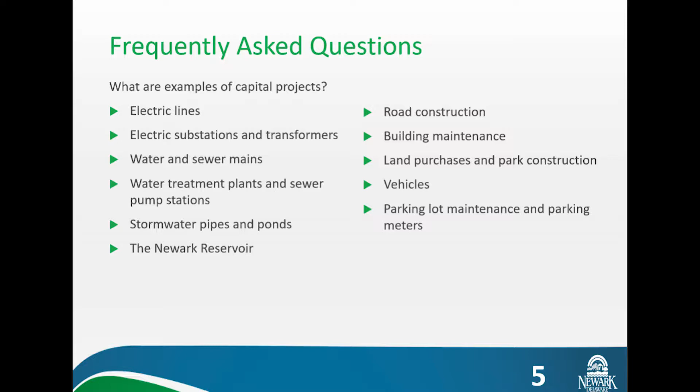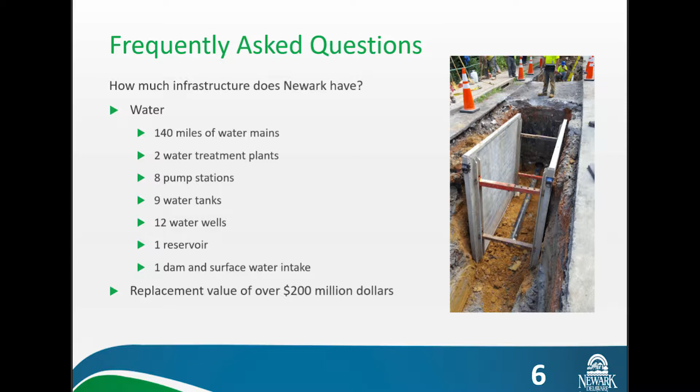We have the most water infrastructure by a large margin, and most of these items are quite expensive. For example, it costs us around $1.2 million to replace 1 mile of small diameter water main like what's in front of your house. In total, we estimate the replacement value of our water infrastructure to around $200 million if we had to replace all of it today. That's almost $6,000 worth of water infrastructure for every resident, and that's just for water.

We also have a lot of sewer infrastructure. The total replacement value for sewer is less than water because it can be more easily rehabilitated, often without digging up the street, but the value is still more than $67 million.

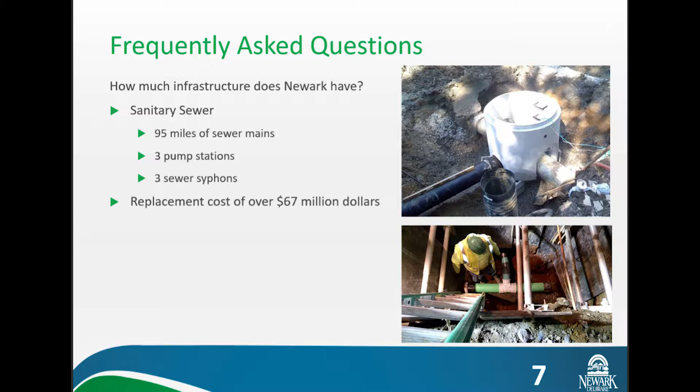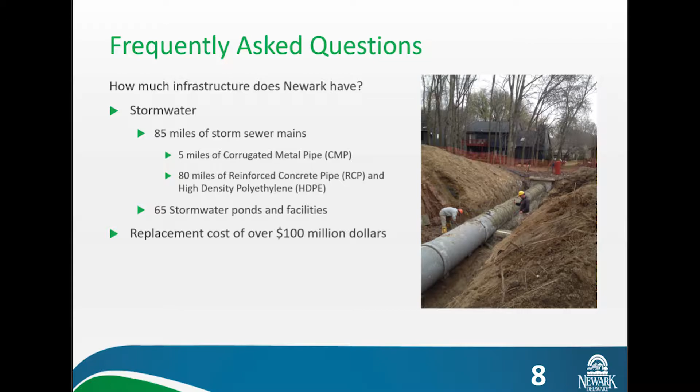Stormwater is even more than sewer at around $100 million. Stormwater is somewhat unique in that we have different pipe materials with dramatically different life expectancies, to the point that we track them differently. Right now we're really only concerned about one type of pipe: corrugated metal pipe, which we refer to as CMP. CMP lasts around 35 to 40 years on average, and we have around 5 miles of it. This is the pipe we're really concerned about now because most of it is already at or beyond its expected life. The rest of our pipe is generally reinforced concrete pipe or high-density polyethylene, both of which have an average life of about 100 years.

In addition to our pipes, we have 65 city-maintained stormwater ponds and facilities, mostly in residential neighborhoods.

Our electric infrastructure is made up of substations, lines, transformers, and our McKee's solar facility off Cleveland Avenue. We estimate the replacement value of our electric utilities infrastructure to be $50 million or more, and that's going to be, I would say, our least confident estimate. It's likely higher, but we went with a low estimate at this time while we're working on it.

In addition to our traditional utilities, we also have our parking infrastructure, consisting of our downtown parking lots and meters. Our parking fund is treated the same as a traditional enterprise utility in Newark, with revenues being kept separate from the general fund, aside from a margin transfer, which is essentially the city's profit margin. Lastly, we have our general fund infrastructure, which includes city-maintained streets, City Hall, the police station, our parks, and other city-maintained facilities.

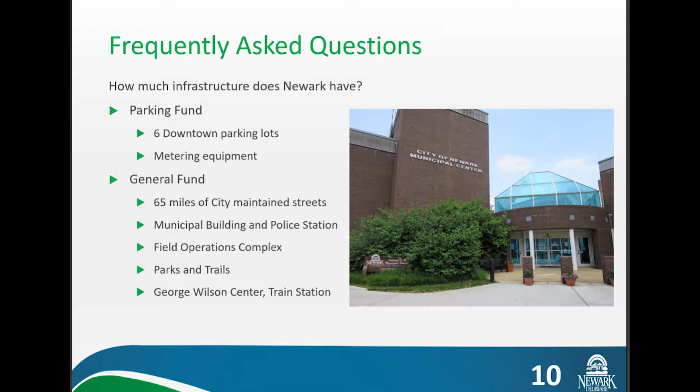This is the infrastructure that's supported by taxes, fees, and margin transfers from the city's various utilities. In total, we estimate the current replacement value of our infrastructure and capital assets at around $500 million. That's a huge number for a city of just over 33,000 people. That means we have over $15,000 worth of infrastructure for every resident in the city.

The vast majority of it's underground or at least out of sight, out of mind. So it's easy to forget about until you hit a pothole with your car, or your toilet won't flush, or the lights go out. Now, while it's helpful to know how much of everything we have, it's even better to know what condition it's in so we can plan.

So what is the condition of our current infrastructure? I'm going to go through each type in the same order, and you'll see we have different amounts of information for each one. Starting with water, I'm going to first focus on mains because they make up the majority of the value of water's assets.

Getting good condition assessment on water mains is difficult because they're under pressure and they need to remain in service during the assessment. We've begun piloting technologies that will indirectly measure the remaining life, but widespread implementation is still in development. In the meantime, we use a combination of our water main break history, water quality complaints, pipe age, pipe material, and industry guidelines to estimate the remaining service life and prioritize replacement.

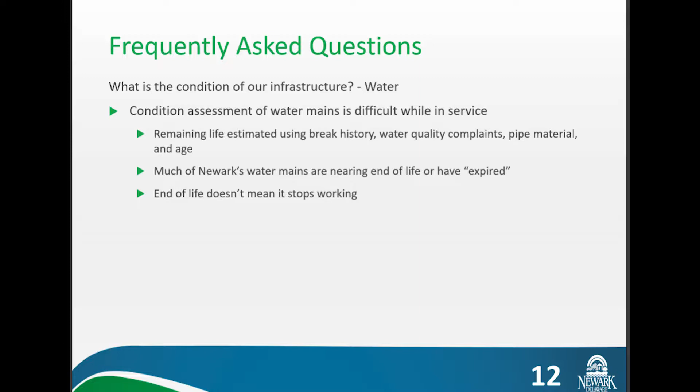As I'll show in the next few slides, a lot of our water mains are going to hit or exceed their expected lifespan and expire in the near future. It's important to point out that expiring doesn't mean the pipe will stop working though, but I'll explain more shortly.

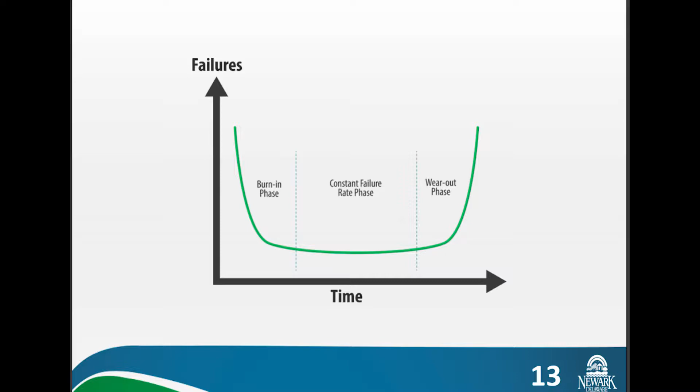Generally, the older the main, the longer the life, until very recently, that is - backwards, the older the longer, until very recently when we started using some advanced laying practices. Our oldest mains, like what's on Main Street, were very thick with an expected life of 100 to 120 years. Mains installed in the middle of the 20th century have a much shorter life, sometimes as low as 55 years. And then mains installed since 2016 are back up to 100 years or more. So it does vary based off age.

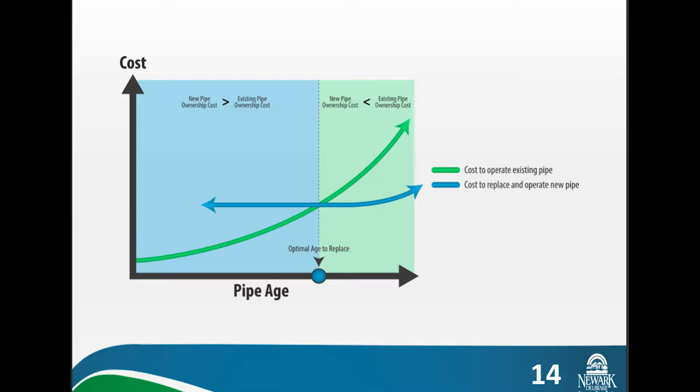The break-even age will depend on, like I mentioned earlier, the pipe material, the manufacturing methodology, but also heavily on soil conditions, because the soil is what causes a lot of the corrosion. We're working right now to develop an accurate estimate for all of our 140 miles of pipe, but that's going to take some time. For the sake of this presentation, we're going to show you information using recommendations from the American Water Works Association, or AWWA, which is to assume 70 years on average.

We feel that based on which areas of the city are experiencing advanced failure rates, this is generally going to be accurate for Newark, or at least accurate enough to give you an idea of the city's average condition.

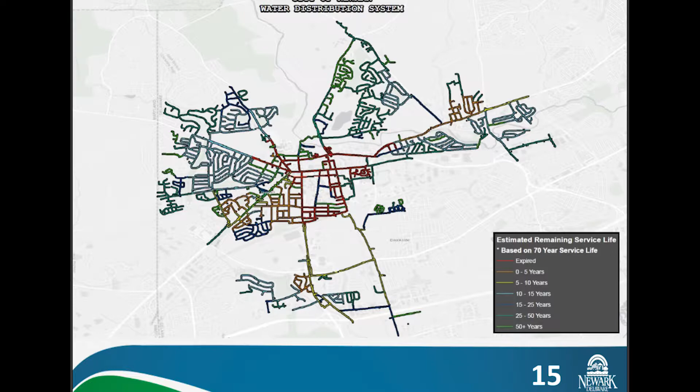Now there are some mains on here listed as expired, like Main Street, that likely do have some service life left despite being over 110 years old. But there are some mains shown with remaining life that are likely already into the expired category. Because of that, try not to focus on individual locations and instead more on the general magnitude of each category.

Looking at all of the pipes in our system, 15 years from now, that number is going to be 74 miles, absent a continued or increased effort to replace mains. That's 57% of the system. It'll be 59 miles even if we hit our current target of replacing 1 mile every year. That's 42% of the system.

And this doesn't count our raw water pipes that carry untreated water and are going to be in similar condition. Based on a recent study by Utah State University, the nationwide average is 16% expired. So we're currently doing better than average, so that's good. But you can see it's not going to be that way for long.

Nationally, the percentage of expired pipes has doubled since 2012 from 8% to 16%. So what we're seeing is being seen nationwide. And the break rate for cast iron pipe, which makes up much of Newark's pipe infrastructure, has increased 46% over that same term nationwide. So this is a problem that's accelerating.

So what does it mean for Newark? Well, we should plan for more water main breaks and interruptions in service. Here we've charted the number of water main breaks every year going back to 1977, which is the first year that we have records. There's a definite trend, which is only going to accelerate as a higher percentage of our mains move into that expired category.

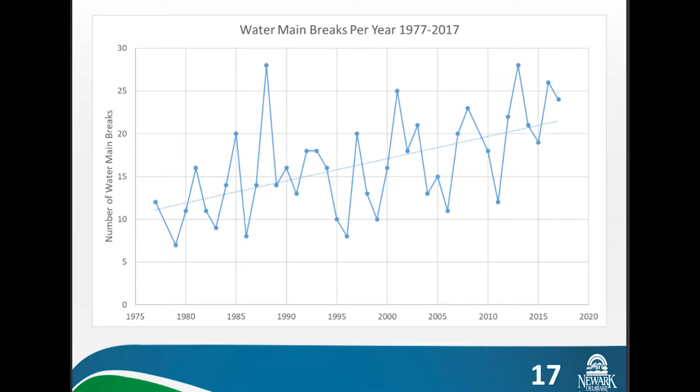Each one of these breaks is generally accompanied by a service outage and occasionally by a boil water order, which can last 24 to 48 hours. These outages have a negative effect on quality of life and, if near a business, on their revenue. Like I said earlier, the pipes don't stop working, they just stop working well.

Moving on from water mains, starting in 2011, the city began increasing our water rates from the artificially low rate that was in place at the time. This has allowed us to really do a lot of capital improvements over the last few years, and we've ramped up our capital maintenance efforts.

While water mains make up the majority of our infrastructure, our other water facilities have a much shorter life, so they punch above their weight from a budget perspective. We've been very busy over the last 7 years, and we've completed over $17 million in water capital fund projects.

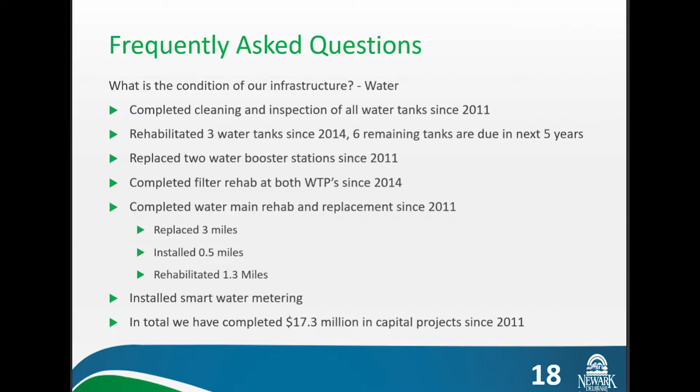We have 2 water treatment plant projects that are currently underway or are expected to be completed in the next 12 months. The first one just went online last week or 2 weeks ago, at our South Well Field treatment plant, making some modifications to our pH system there. The second is a project to convert from chlorine gas to a liquid system at our surface water plant and make a bunch of other upgrades to the building envelope.

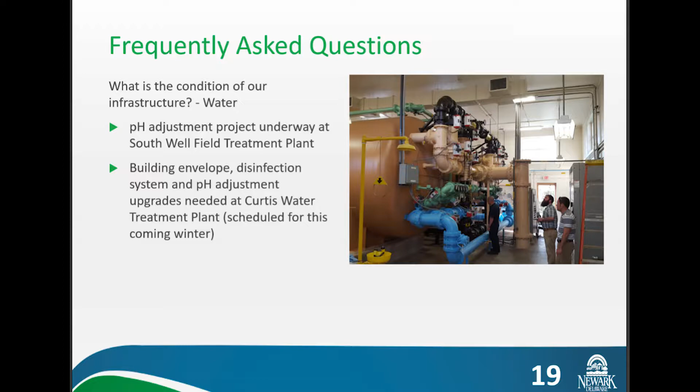On the sewer side, we've been working to inspect and develop a prioritization for our rehab work. So far, we've inspected around 15% of the system and identified around $4 million of high priority repairs. We began making many of the repairs during 2017. We'll have another project underway this summer. It's actually underway right now.

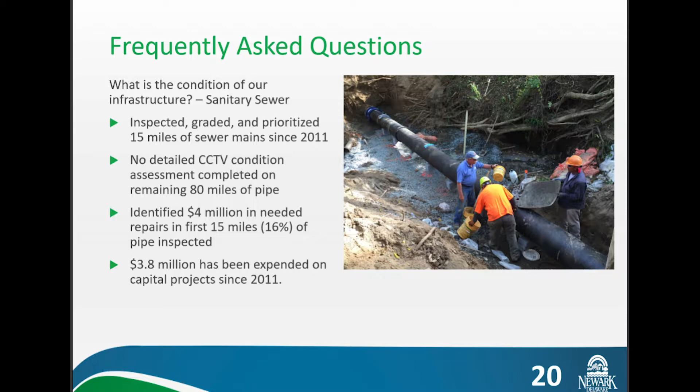Since 2011, we've spent nearly $4 million on sewer capital projects and have rebuilt all of our sewer pump stations to modern standards. On the stormwater side, we've been focused on corrugated metal pipe, like I mentioned earlier, since it has such a short service life, and it's been failing all over the city.

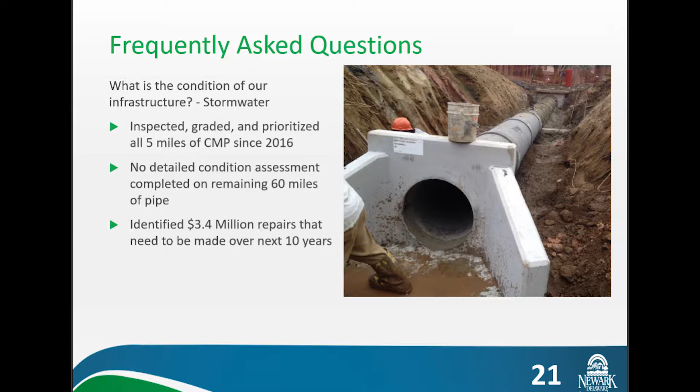Starting in 2016, we completed a citywide condition assessment of all the known corrugated metal pipe and prioritized the repairs. In total, we identified $3.4 million in repairs that we'll need to complete over the next 10 years.

As many of you are likely aware, Council authorized the creation of a stormwater utility, which became effective on January 1st of this year. Because of that, we have a stable funding source that's been designed to provide us an adequate amount of money to meet our operating expenses and to complete the repairs that have been identified over the next 5 years. So that's a good thing.

But the current rate will not cover the cost of the proposed Rodney project, which would result in the need to increase the median residential stormwater bill by a little over $1 a month.

For our road network, we have a full pavement management program where we complete an annual inspection of all our roads, rate them, and then have those ratings run through an optimization program to develop an optimal project. If we were to keep city-maintained roadways at their current average citywide, we need to spend around $1.75 million a year, every year. We've only been able to do that number one time since 2011.

We also have about $1.5 million in parks capital maintenance scheduled over the next 5 years. So how did we get ourselves into this position?

Well, up until now, absent a few specific projects like the reservoir and the South Well Field, we've been using only cash for our capital projects. And that limits our ability to tackle large projects because they crowd out smaller, less sexy replacement type projects and preventative maintenance. It's a lot more exciting to have a new ribbon cutting than replacing an underground pipe that's generally worked for your entire life.

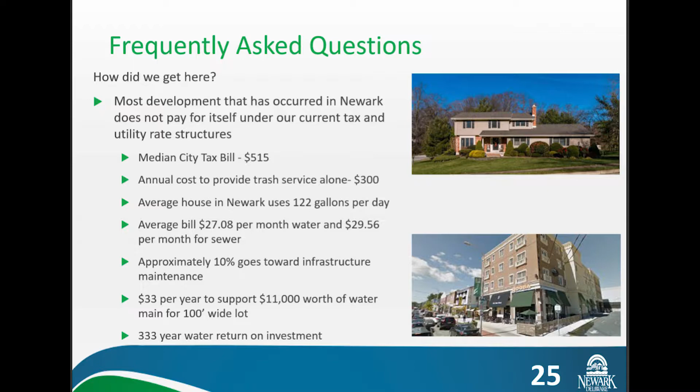Fortunately, we have locations like our downtown and our industrial users that are able to offset a lot of the shortcomings of the neighborhood areas, where a house may take over 300 years to pay off a section of main. A building like 58 East Main Street, the one there in the bottom right-hand corner, will do it every 2 to 3 years. We see a very similar pattern in our tax structure.

So here's a still in development map that shows whether a property is paying enough in taxes to pay for the general fund services it gets. While it isn't complete yet, the general idea and scope is not likely to be significantly different once it is. Based on our preliminary estimates, all the parcels in red do not provide enough in tax revenue to cover the cost of providing them with general fund services. Some may come closer than others, but they still don't cover their cost.

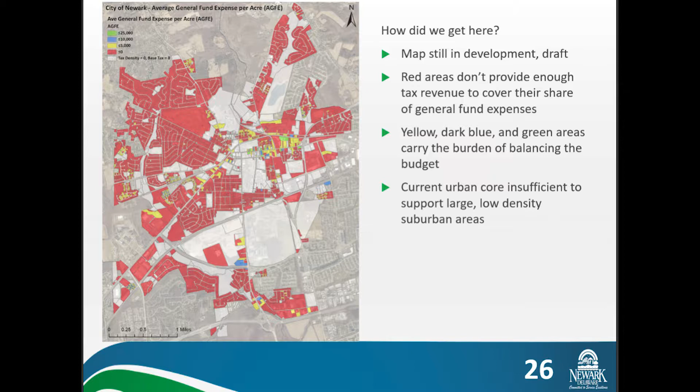Parcels that have a positive value are shown in yellow, blue, and green, and those are the properties that make up the difference and balance the budget. What you can see is that in general, single-family detached housing is negative, which means if we were to approve a new single-family neighborhood today, it will make us poorer as a community, as we'll be taking on more liabilities than revenues. Higher density development, on the other hand, like townhomes and downtown mixed-use projects, will help reduce the need for future tax increases because they pay more than their fair share.

Now, if any of you live in a condo or townhouse and you've got friends that live in a single-family home, I don't want you to start giving them funny looks and stop hanging out with them. That's not what I'm trying to say, but I wanted to point out there are certain development patterns that aren't productive for the city, so we can make smarter decisions moving forward.

And the first step to dealing with a problem is admitting you have a problem, and we have a problem in that a lot of our city costs more to maintain than it brings in.

So I know this presentation has been a lot of doom and gloom, but it's not all bad news, and it definitely isn't unique to Newark. Cities all across the nation are looking at the same problem, whether they know it or not. Illinois, for example, just determined they need to spend $21 billion per year on infrastructure, when historically they've spent closer to $3 billion. When you consider their entire budget for the whole state is only $38 billion, you can see what kind of problem they're facing.

Fortunately for us, I think we're in a much better place than a lot of other cities for several reasons. Firstly, there's a will on council to tackle the problem, which is evidenced by the fact that we're here today talking about taking on debt to start getting in front of it. We're also a relatively compact city compared to our peers. Dover, for example, has 2.5 times our land area and only 10% more people. So they're in a much worse situation than us.

We're in the very fortunate position of having the STAR campus, which is going to be bringing all new revenue to the city soon. So every private project that's completed at STAR will bring us tax revenue and utility revenue that we haven't had before at all, or at least not in a long time.

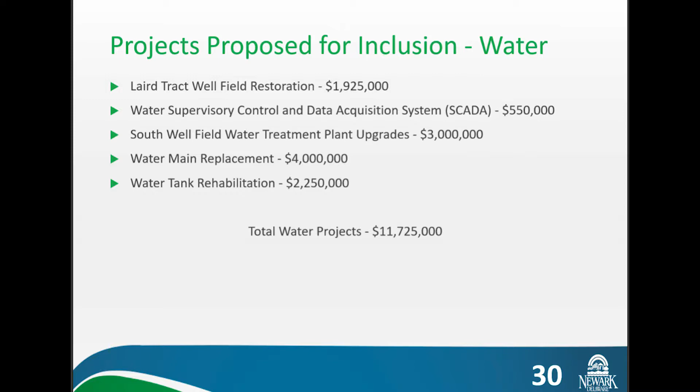So moving on to sewer, it's about $3.9 to $4 million for the sewer project. As Tom mentioned earlier, our sewers are generally easier to rehabilitate because you don't have to dig them up. This project is inclusive of several steps. It looks like one project, but it actually has several steps. The first step is to identify the critical lines and perform inspections using closed circuit television, or CCTV.

Essentially, when we block the pipe, we send a camera in and look for imperfections. The CCTV inspections are then reviewed and the defects in the pipes prioritized in a report, which we utilize to group the projects identified for similar rehabilitation methods. Some we do have to dig up and replace, they're just that bad. Some we can put a liner in, others there's just one small spot we can dig down, fix that one little spot, and the rest of them are good to go. Sometimes we fix a little spot, then we line through it. These generally give us another 50 to 75 years of life in the same pipe that may be 50 to 75 years old.

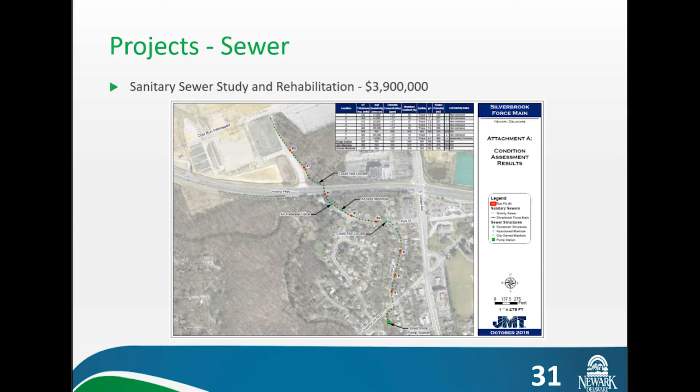So as Tom mentioned, we have identified roughly $3 to $4 million worth of repairs after inspecting about 15% of the system. It should be noted that we have completed close to $1 million of these specific repairs in the last few years, and we actually have a contractor that's been in and out of town the last few weeks making some of these repairs. If you tried to get out of McDonald's last week on Main Street, there was a contractor there.

It's very quick and easy, and they get in and out, but sometimes it is a small inconvenience, but not as inconvenient as having to dig up the road and repair the road.

So we'll move on to stormwater. This again is one project, but as I'll explain, it's been split somewhat into two projects. Hopefully many of you have heard or seen our proposal for purchasing the former Rodney dorms and demolishing them to make way for a stormwater management pond with park amenities. If you look over on the board on the right-hand side, that has one of the concept plans, which I'll describe in a little bit.

This is a once-in-a-lifetime opportunity for the city to acquire a piece of land well situated to help achieve stormwater quality and quantity improvements. The parcel sits at the top of a large drainage area where little to no stormwater controls exist. Managing stormwater near its source is a key benefit to downstream systems.

The parcel is also situated in an area that lacks city-owned open space in close proximity to our award-winning Main Street. We didn't actually think of it that way when we got started, but we looked at a map of all the city-owned parcels and parks, and the downtown area really had almost a donut hole there that this parcel can fill in. Approximately 6,000 residents live within a 15-minute walk of the property, and nearly two-thirds of our residents live within a 10-minute bike ride of the site.

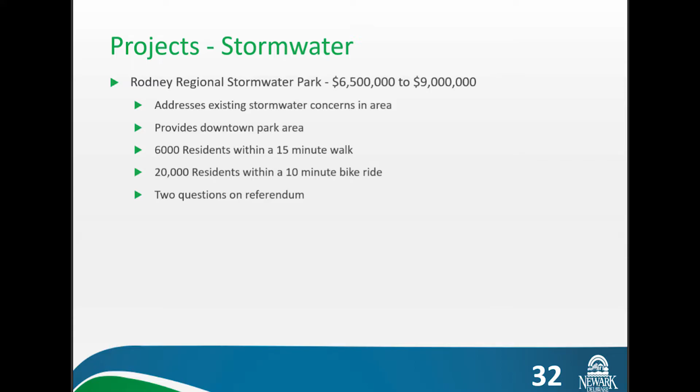It's important to note that the concept plan for the pond and park features presented is the product of an extensive public process that included input and suggestions from many residents in a year-long effort throughout 2017.

Although the project vision was to develop the pond and park together as complementary to one another, we are able to break out the stormwater management needs from the aesthetically pleasing park amenities into two questions on the referendum.

A yes vote on Rodney, question 1, will authorize council to borrow money from the state revolving loan fund for the purchase of the property, the demolition, environmental remediation, pond construction, and some minor amenities to allow site accessibility and maintain the current pedestrian pathway through the site. Minor landscaping and pond edge treatments would also be included. The estimated cost associated with this question is $6.5 million.

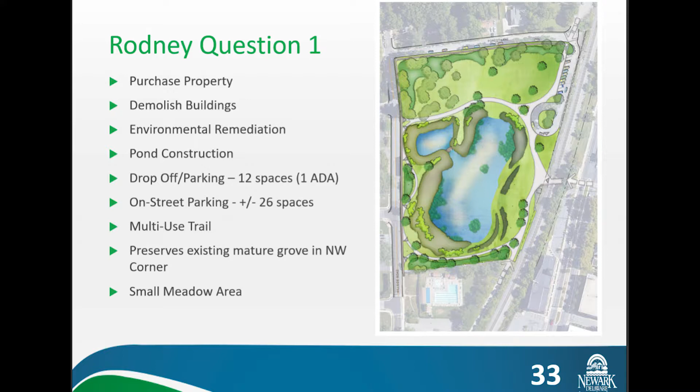A yes vote on Rodney, question 2, will authorize council to borrow money from the state revolving loan fund to fund the majority of the park amenities that were discussed and chosen as part of our public workshops in the summer of 2017. Residents who participated in this discussion agreed that the passive recreation coupled with small classroom space and picnic areas was the best fit for this space.

An accessible fishing pier was included, but it's important to note that the pond won't be stocked. Fish and birds will slowly bring fish in, and there are very few ponds that don't eventually get fish. If there's not that many, it makes them harder to catch, which makes it more fun, or more exhausting.

So extensive educational signage and elements will be integrated into the site to show residents and visitors the role stormwater management plays in our ecosystem and in our city.

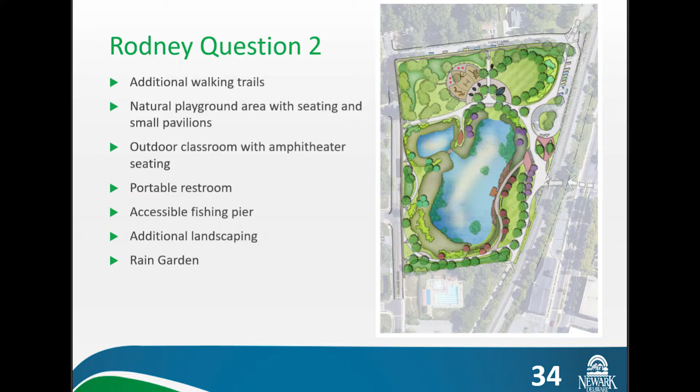As Dave Del Grande will discuss later, the funding for the park amenities through the revolving loan fund is locked at 2%, and the approval is awaiting our signature. Funding these upgrades in future years with other sources of funding will cost more money overall.

So now there's a bucket of projects that are part of the general fund that I'll go over. These are general fund projects included because they're necessary for the operation of the city, yet they always seem to get lower priority compared to utilities and other larger projects.

Our ADA transition plan is a federal requirement that we upgrade or modify our ADA facilities throughout the city. Most of this is what you may have noticed around town, the domes on the sidewalks at intersections. These are federal requirements to upgrade handicap accessibility and transportation routes to comply with current ADA standards.

We have replaced nearly 1,400 of the 1,800 existing ramps, as well as upgraded many city-owned facilities, including the Wilson Center, and City Hall itself had some ADA upgrades in the past year. Once we're about 10 years off, we do about 40 of these ramps a year. I certainly understand the federal government will likely change their mind in 10 years and we'll start all over again, but for now this is the standard, and we need to keep up with our ADA transition plan.

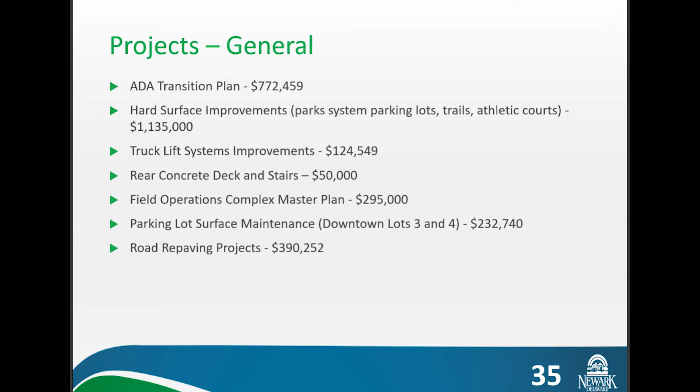We have failed to meet the minimum needed to simply maintain the status of our current street system. Tom didn't point this out, but it's important to note we know the condition of Main Street. Main Street is a DelDOT road, and there's a plan to do some patching starting in early June, which should hold things over until they come in late this year for about a year and a half to do a full reconstruction.

That includes taking out all the concrete and asphalt and replacing it with fresh asphalt, and doing some ADA upgrades as I mentioned before. That's going to be an extensive project, but they'll come in for about a week in a few weeks and fix some of the worst spots to hold us over until the bigger project.

As many calls as we get, we pass those along to DelDOT, and I think they're getting tired of hearing from us. With that, I'll turn the presentation over to Dave Del Grande to discuss why we're looking at financing these projects using debt, and the options we have based on the fact that we're a municipality.

Thank you. Good evening, everyone. I'm Dave Del Grande, the Finance Director. Thank you for your time this evening. So ultimately, why? Why now? Why haven't we done this in the past, and what's our plan going forward?

The city has historically used cash to fund the majority of our capital needs. Debt financing accomplishes two main goals. One, it fairly allocates the cost of the project over its useful life, allowing everyone to pay their fair share of the cost over the period the asset is in use. The other is that long-term debt has minimal impact on the annual budget, keeping the city's annual revenue requirements as low as possible. Low revenue needs translate directly into lower utility and tax rates and fees that the city must charge for the services we provide.

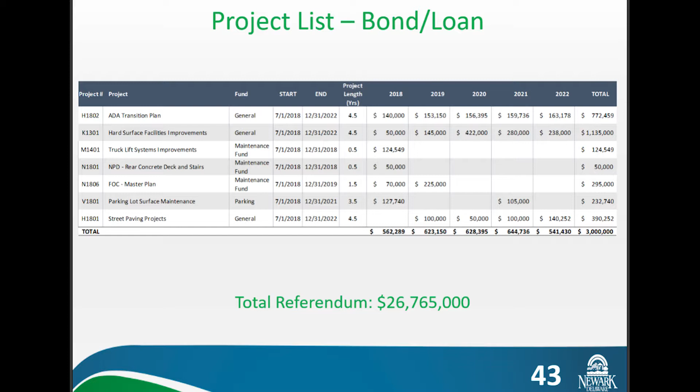This chart displays the projects earmarked for bond or loan funding, assuming that all of our other projects are approved through the state revolving loan program. All these projects were expected to begin after July this year, pending a successful referendum on June 19th. In total, the total amount of the project list is $26,765,000.

So ultimately, we're sharing the cost of these projects to those who have not moved into the city and those who will be using this infrastructure as we get into those years.

The question we have received a lot is, what if we use cash? If we pay strictly cash for these items, we would have to come up with $26.7 million between now and 2022, and our debt schedule would substantially increase over the next 4 years. The projects would get completed, but raising such a large amount of cash in a short period would be a challenge if the projects were continued as they exist.

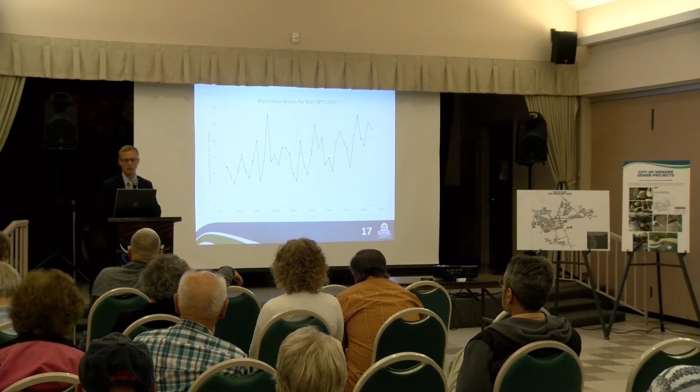Ultimately, it depends on how accurate we can get our data, how fine-tuned we can get it. Realistically, there's no way we're going to be able to replace that. We're not going to keep up. Financially, it would not be possible. Realistically, our main break rate's going to go up. I don't see any way we'll be able to tackle it, just knowing what people can actually afford.

Order of magnitude, it's really hard to say. I think at this point, water and sewer wise, we'll be through a lot of the big one-off projects, unless something we don't see coming happens, like what happened in Blades earlier this year, where they detected a perfluorinated compound in their water and had to put in an activated carbon system that's like $1 million. Something like that could happen at any time. We don't see that coming. We've sampled for those types of things and we don't have them here, but you never really know.

The big thing for us is dealing with our road network and our water mains. These are the things I want to do with cash moving forward, but I just don't know if we'll be able to actually afford to do that.

One benefit we didn't get into in the presentation is once we have loans in the SRF program, the State Revolving Loan Fund program, it opens up a whole bunch of new options for us for grants. There are low-income subsidization programs, so as soon as you have a loan from the water SRF, you have access to up to $200,000 a year to help low-income residents pay their water bills.

As soon as you have a loan in the sewer fund, you similarly have access to $200,000 to help low-income residents. There's income tests and things like that. But those are things we don't have access to today that we would have access to by the end of the year if we get into this program.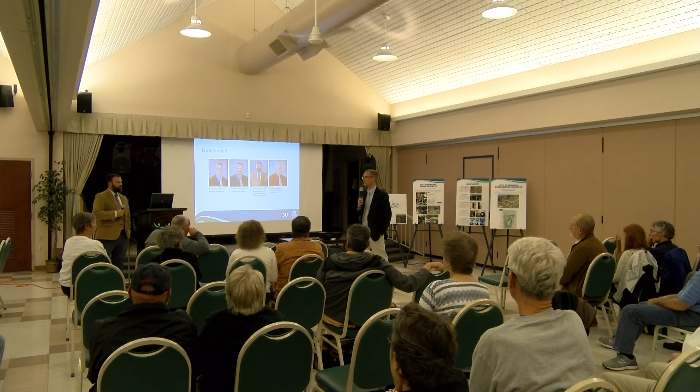Just real quick, I know we tend to focus on flooding because that's what you can see. We also have another component, the water quality component, which is another federal program. So whilst we can't necessarily be fined for flooding, we can actually be fined for the quality of our water.

In this watershed, there are very little existing stormwater management features or facilities. So this will enable us to treat some of that water. And again, it doesn't necessarily affect our drinking water because it's below our intake, and it's on a different creek than our intake.

But this water eventually goes down and joins with White Clay Creek, Christina, and is where Suez Water, United Water, Delaware takes their water to serve about 400,000 residents in Delaware. So it is eventually someone's drinking water, and I know there's other water downstream that it mixes in with, but we have to do our part according to the federal government, and we can be fined for not doing our part.

So we have a full stormwater quality program that includes education, and a lot of the items - in my opinion, education is great, but when you actually put something in the ground that cleans the water, that's when you're actually making a difference.

The big thing is meeting our water quality requirements of our federal permits. Our permit right now is about 15 years old, I think. It's been extended 3 times. They've been telling us the new permit's coming since I've been at the city. We're convinced it's actually coming in the next 12 months. We've seen a draft of it, and while it doesn't have numerical requirements explicitly, they're coming, and anything we do here will help us meet those requirements into the future.